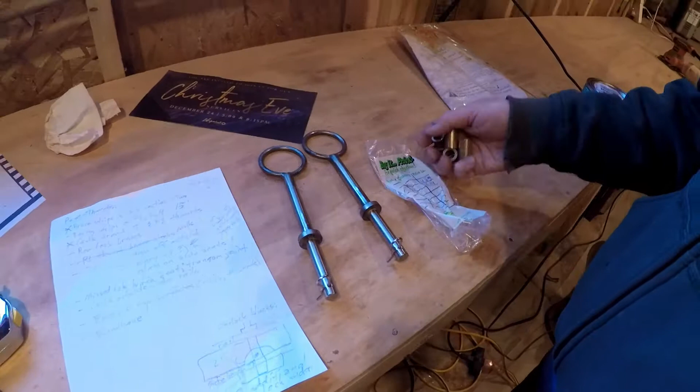Another milestone - first hardware purchase. These are custom designed oarlocks. I was meeting with a friend of my neighbor's named Robin Flood, who has a manufacturing company here in town, and sketched on a napkin what these might look like. A week later there were two sets.

The first set's with Brian and Kim for their boat that I was making at the time. This solves a problem I encountered with that boat, which is getting the oars up in the air so they don't rub on the edge of the rails as they're going back and forth, without having to put a great big mount on there. This is also where you want to sit most of the time when you're solo sailing and you want to lean out to get the tiller and the sheet, so you don't want a big lump there. So these guys get them up in the air, and it worked really well.

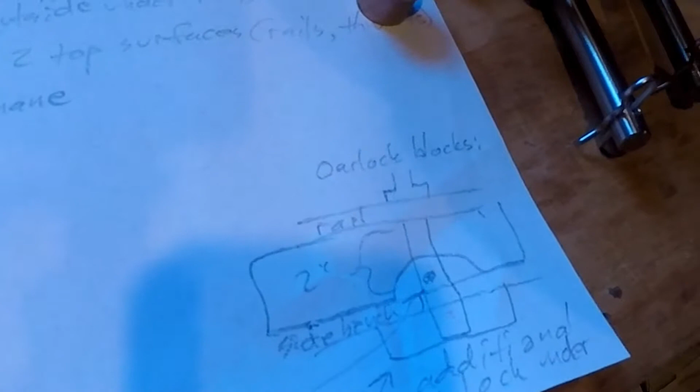And Brian and Kim, nicely enough, gave me the spare set, which Robin, nicely enough, made for us. So the first hardware purchase is to figure out how to mount this through the rail. Unlike Brian and Kim's boat, there's a lot less room - there's this side bench in there, I guess. They didn't have that, so I've got to think about this.

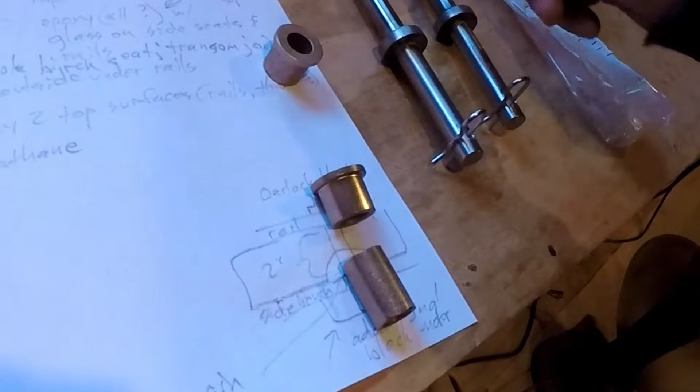I'm thinking we have a piece there and a piece there, and I have to re-drill the cotter pin hole to be in the gap, because there's not room for this all to go through without running into the seat. This guy will sit up on the rail. It's a little tight, I have to grind it out a little bit. There we go - so this will sit up on the rail, with some backing underneath the rail to distribute that force down to the hull.

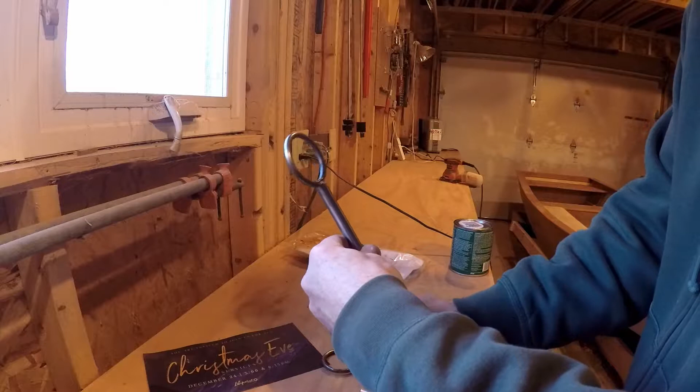And this will sit through the seat, again with some backing under the seat to distribute that torque. And then we'll drill a hole where you can reach under the rail and put the cotter pin in and out, and I think that'll work pretty well.

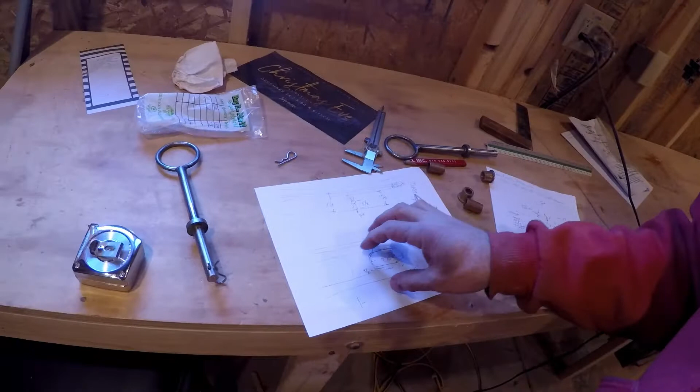Went ahead and got the old masking tape off, getting closer to trying to finish this thing. I've been pondering how to make this oarlock brace, and realizing this guy's sitting right on the rail, let down in, that'll work nice.

This guy ends up - you can get it flush to the bottom of the side bench, but that pin needs to be able to do a 180 underneath the rail, and it gets really tight.

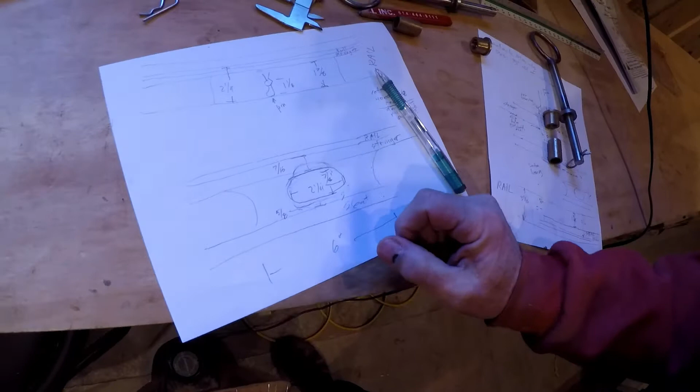What I'd like to do is build a block that locks in the rail, the stringer, the seat, and the hull, and those brass bearings all into a unit, and distributes that stress. But it's a beautiful cold day, so I think what I'm going to do is get the shop temps up and hit everything that hasn't had one coat with epoxy, and defer putting in the oarlock mounts. Looking forward to seeing what the grain does when we hit it with this first coat of finish.

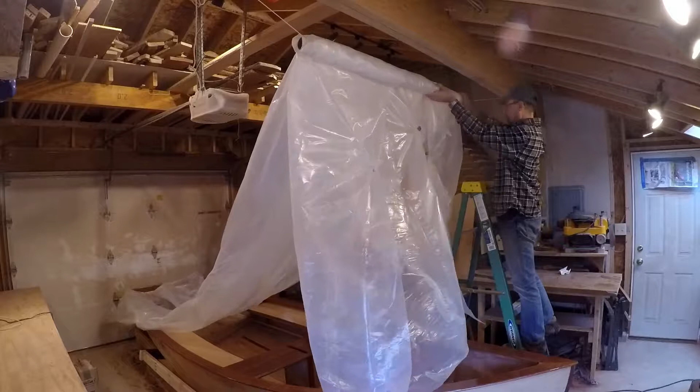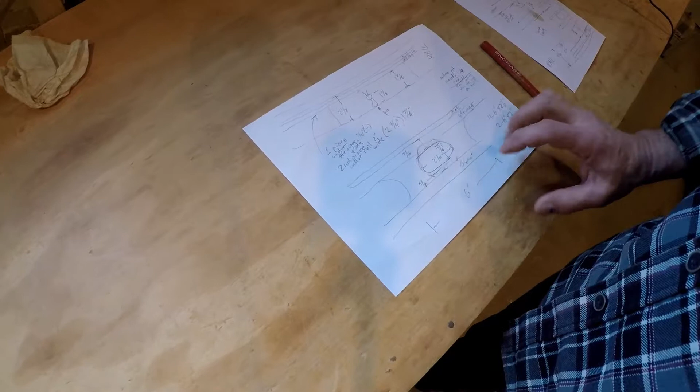One piece sits down underneath the stringer, a little bit not as tall. Two more pieces laid in there that come up all the way to the rail. Shape that with a little hole for the cotter pin, make it look nice hopefully, then glue it all together — two versions of that. To start with we need 4 pieces that are 6 inches by 2.5 tall, and then 2 pieces that sit back underneath there on each side, 6 inches by 2.

Trim the top back on this edge, cut it back overall, and then figure out how to carve this hole out of it. Pretty good. Now I'll cut it off the face, do the same on the other side.

Alright, so we got this guy, it's going to be sitting back in there. The oarlock coming through, and we need to make this sort of oval opening that supports the bottom brass bearing here as much as we can, the top here, and yet provides ability to get the cotter pin in and for that cotter pin to turn 180 as the oarlock is turned on top of this. It'll be a bit of a puzzle, we'll see.

So I'm thinking we cut 2 drill bits there that'll make the end of whatever this shape ends up being. Then take the center out, I guess. See how to connect the dots then.

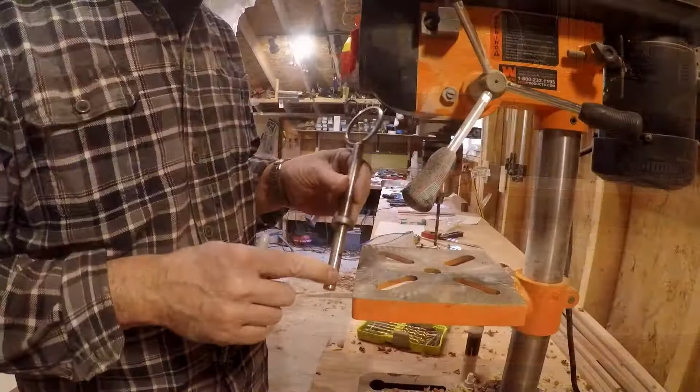Alright, last thing we need I think is a different cotter pin hole to go into that oval. This guy's going to be down in the middle of the side bench. So we'll see if we can get that done. Keep the bit cool, go straight through.

One last test. Alright, there's our little cotter pin opening — 180-degree capability. I really like it.

Alright, clean it up and get ready for another coat of epoxy on all this top surface, as well as locking this guy in.